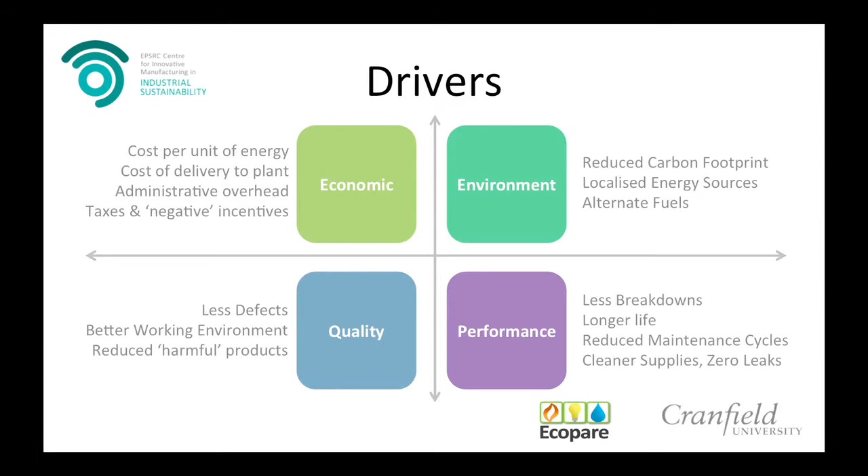I'm not going to go into huge amounts of detail about that. What I'd rather do is hand over to Aanand and some of the things that he's actually talking about and doing.

Thanks, Craig. So, ladies and gents, basically what myself and Craig and members of the EPV team who are outside today are trying to do is help you make modelling an integrated part of your process, and develop it as an iterative tool that's easy for you to integrate with what you already know about what's happening on your shop floor.

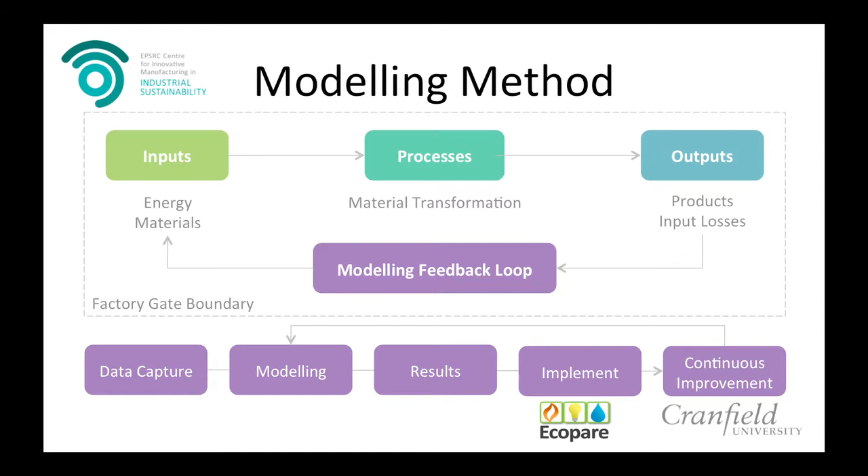So we're looking at things that you hopefully already have a bit of an idea about, like your energy and materials being input, and the material transformation that happens on your shop floor across your processes, and what outputs you're getting from that. And the modelling feedback loop that occurs there - we're looking at things like how you capture the data, how you can model it through different levels and different slices, the types of results you get, and how you can implement those, which Craig will pick back up on at the end, and how you can then remodel and develop routines for continuous improvement.

So ways that you can capture data, or ways that we've been capturing data over the last 2 years, are pretty varied, and you get different levels and different granularities, as we like to say, within the modelling arena of data, and those different levels can give you different amounts of output.

So we work with a number of different companies that have highly evolved systems where they have SCADA in place - supervisory control and data acquisition systems - and they have lots of sensors on all their machines. But we also work with SMEs who don't have the capital or the existing technology there to invest in those sorts of things, to model and measure their equipment and their efficiency.

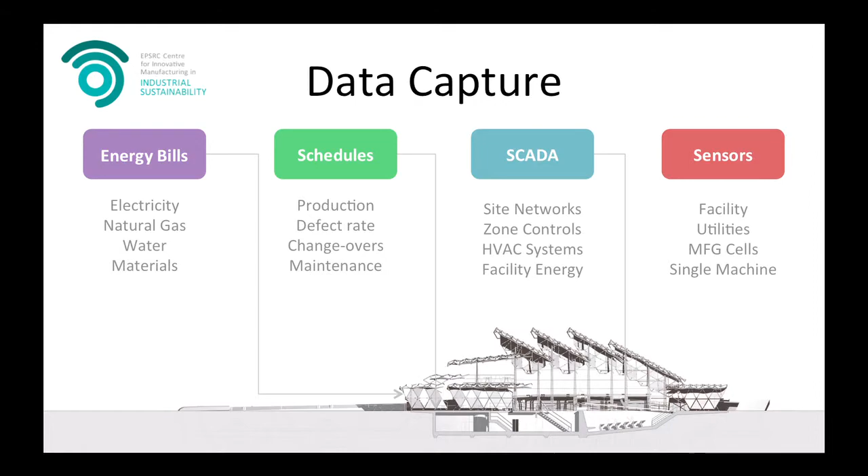So what we do is we actually start with very cursory bits of data, such as your energy bills, your production schedules, things that you have on paper, and then eventually develop that into the kinds of more detailed data from SCADA and sensors, if need be. So I just thought I'd give you a quick sample of the types of cursory models that you can create, and this was literally created from a series of different utility bills.

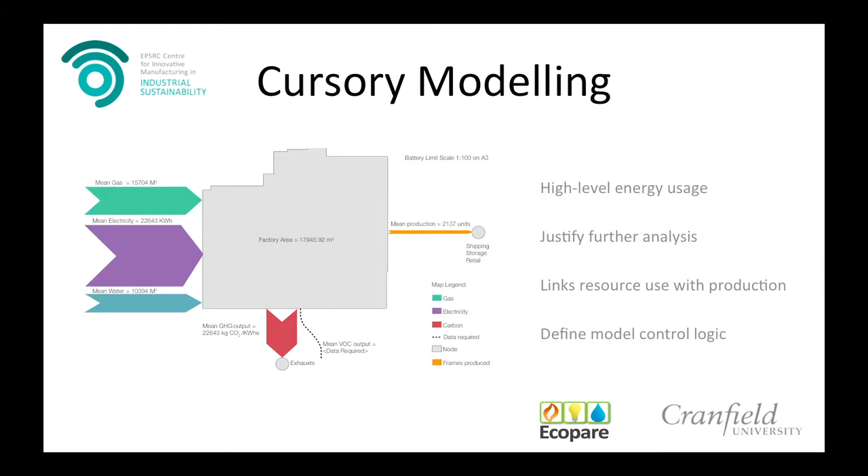This shows you at a very simple level what is going into and coming out of your system. Hopefully, as you can see, you've got a lot of resources going in for a pretty small amount of product coming out at the end. The point is to show that there's a lot of materials going in at this level, your factory gate, what's going into my facility level.

We then broke this down, and I purposely haven't put images in to show the breakdown here, because I want you to come over to my poster stand and have a look at it. But the idea is you can break that down into the different zones within your factories, and also the different bits of equipment and different processes and operations that occur within that process. So there are lots of different levels you can break this data down into.

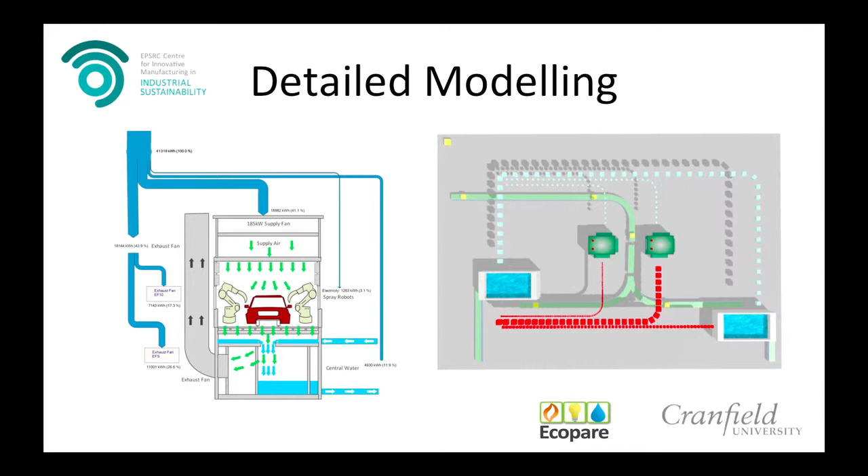To give you a quick overview of a little sample of the more detailed types of modelling, this is showing an energy breakdown for a paint shop for one of the automotive firms we're working with. What we've done here is create a scaled Sankey style diagram that shows your energy breakdown and also your water breakdown across this process.

The other thing we're intending to do is develop statistical distributions within our simulation tools that actually model that for you.

What this visual is showing is a lot of boxes, but those boxes are representative. The red represents energy, whereas the blue represents water. As product goes along your conveyor, you have a certain amount of energy being delivered to your process in order for that product or material to be transformed. So what we're trying to show is the dynamics of the system as data is being fed into it, for energy resources and also for water and other resources going into your system.

I'll let Craig take back over for this bit, the important bit.

I think what Aanand shows is something that's a little bit more than just looking at a lot of graphs for energy management and resource efficiency. One of the things that really excites me is being able to visualize some of that energy. Typically what we use is standard systems to do that - the typical graphs, things like power quality, thermography, which if you go and have a look at some of the things especially at Loughborough are doing, those are all very good visualization tools.

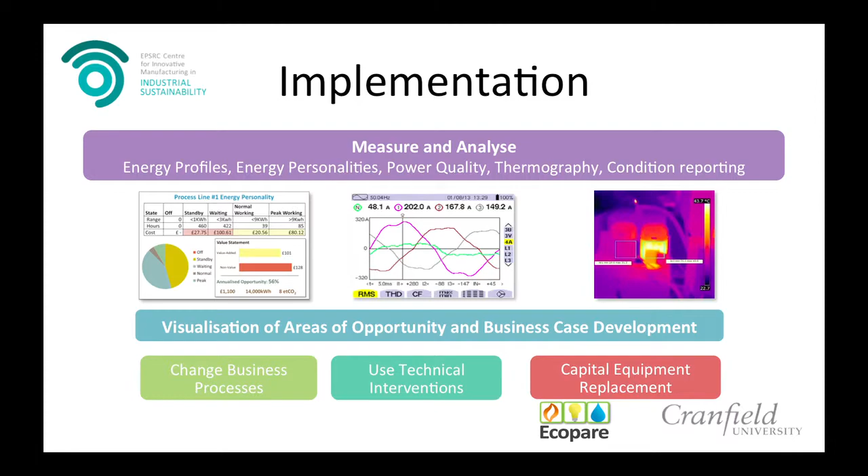But taking that from a theoretical point of view to a practical point of view, we see three things that come out of that. One, you can change your business processes. Two, you can do a technical intervention, which to you and me is put a timer switch in. Or three, you can actually go and do a mass capital replacement project. In reality, you're probably looking at the first two as the type of things you do in a normal manufacturing or industrial area, and leave the capital equipment side of it to the end, for the simple reason that everybody says that's very, very financially intensive.

What we've seen when you go down the sustainable side of things - and I want to use this as an example - we decided to look at the paint shop within a manufacturing facility, and we found something else. We looked at the lighting, and there's been a lot of talk about lighting and LED in industry, with everybody going through big projects, not just in a facility, but in a process.

There's some really good savings, about 60% savings in energy. But what people don't realize is there's a couple other things that change when you start looking at lighting in a process. Take this graph here - I've found in business there's two types of graphs: a sales graph, which needs to go up, and then the financial or quality graph, where as your quality increases, your defect rate goes down. So quality and finance both want to go down.

This one here shows a particular process where we changed the lighting systems and standardized on a particular set of attributes. We got a 20% reduction in the parts of dust per vehicle going through. Anybody in the automotive industry can equate that back into cost savings, because the vehicle doesn't need to go through the plant again.

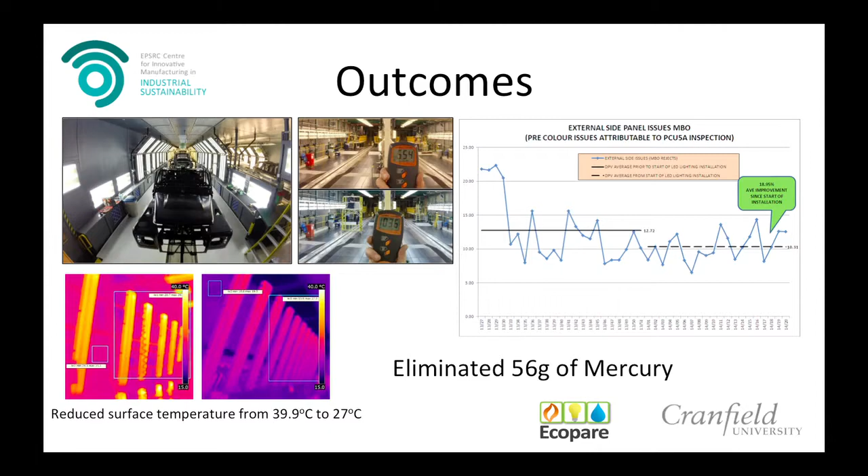There was another one we thought we couldn't capture this data, but we managed to - the working conditions. Those two thermography pictures show the ambient temperature, which was roughly 40 degrees - you'd put your hand on the wall and it's about 40 degrees. Ten days after we did the project, we came back and measured again, and it had gone down to 27 degrees. So sometimes sustainability and energy reduction can give some really interesting other benefits.

And the last one, which I like, is we managed in that process to reduce 56 grams of mercury by reducing the amount of fluorescent lights in there. That's a really good story for anybody's books, because if you take 56 grams of mercury and put it in your hand, in about 6 days' time you probably won't actually be alive.

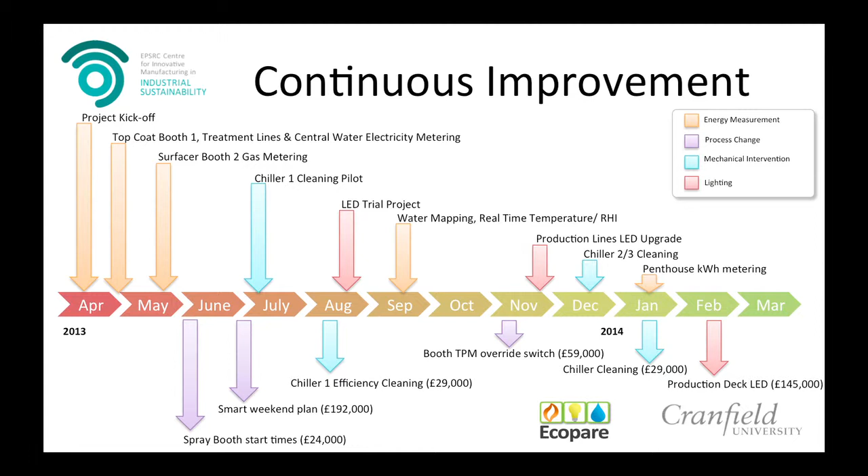But taking that as a small project - one of the other things we're seeing with modeling is being able to get continuous improvement, and sustainability is a continuous improvement. This shows you over a 12-month period - Aanand's been in and out of one or two of these projects. At the end of the day, in one particular plant, we took roughly £500,000 worth of energy out without major capital investment, looking at it step by step through small processes. Most environmental sustainability or energy managers will tell you to take those small steps, and with modeling, and what Aanand and some of the other guys are doing, it allows you to take those small steps without using big capital intensive projects.

Aanand, do you want to take it?

Yeah, so as I mentioned to you guys earlier, we work with a range of people - they can be large firms, they can be small firms. You could be looking at cars, you could be looking at planes, you could be looking at plastic and rubber manufacture. But the point is the lessons you learn from one, and the types of modeling and efficiencies you might be looking for, could be applicable to many of those across the board. So if you guys are interested in finding out about some of the stuff we do, come and have a word. Cheers.